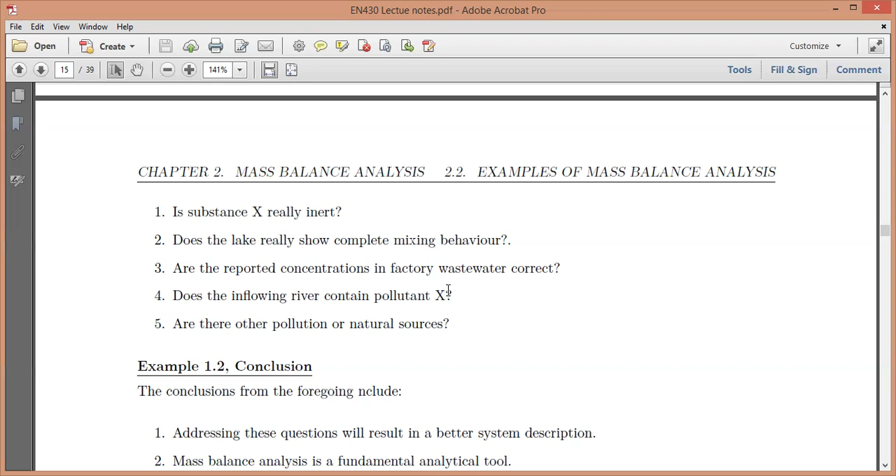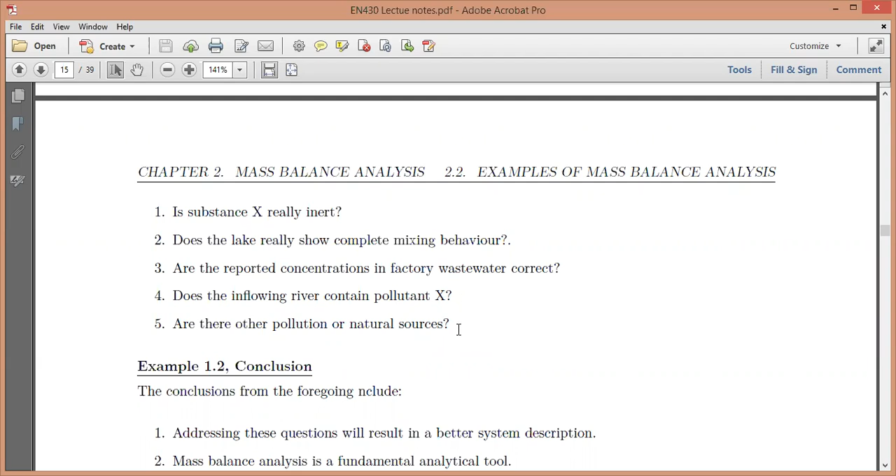Does the inflowing river contain pollutant X? So you may write off the inflowing river as not containing pollutant X, when in actual fact it may be carrying pollutant X from some other effluents that it may have collected upstream. Or are there other pollution or natural sources which could be emitting this pollutant X other than those two factories that you have? So those are some of the questions that you may have to revisit.

Okay. So addressing these questions will result in a better system description, and mass balance analysis is a fundamental analytical tool. So like we mentioned earlier, mass balancing helps us understand where our material is going and whether or not we're using it efficiently. And it also helps us, in this case of the lake, understand the concentrations of these pollutants in the lake or in whatever water body.

So not long ago, there was that truck carrying sodium hydroxide that plunged into the Kampinsa River some months ago. Maybe some of you may be aware, or maybe some of you may even work for the same company. If you were the environmental officer there, what was going to be your main interest in that particular incident? You have sodium hydroxide, a truck plunging and spilling all that sodium hydroxide. So what would be your point of interest as an environmental officer assigned to that, or an inspector under ZEMA? What would you be interested in knowing?

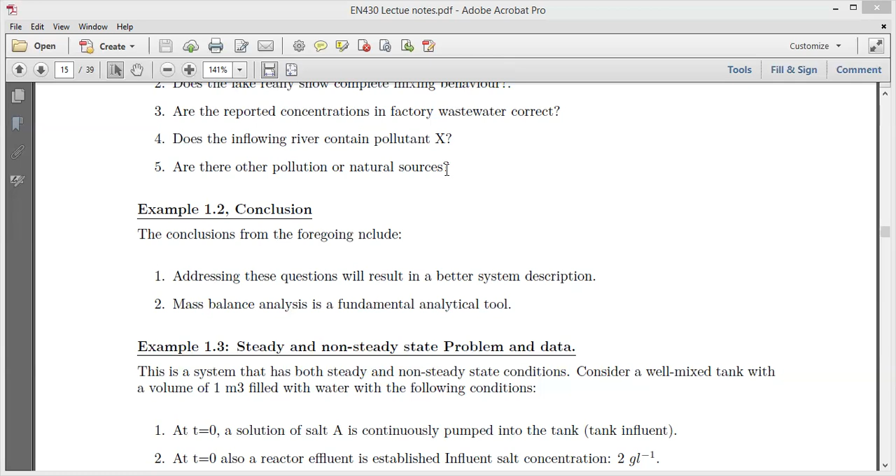Okay, we move on. Let's look at a problem here now that involves steady and non-steady state problem and data. We've understood what we mean by steady state, but we're going to now look at a problem that involves both steady and non-steady state in one question.

So here we're told consider a well-mixed tank with a volume of 1 cubic meter filled with water with the following conditions. Condition 1, at time equal to 0, a solution of salt A is continuously pumped into the tank as tank influent. Remember it's not just plain salt, it's a solution of salt A, continuously pumped into the tank.

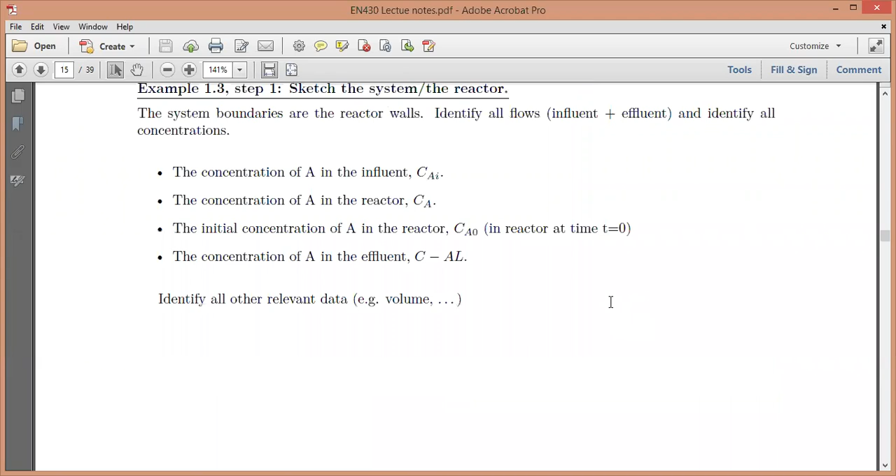I hope you're imagining with me. Do we have the sketch here? We have the sketch down here. Then at T equal to 0, also a reactor effluent.

Sorry about that. I seem to have been logged out. Let me just quickly share the notes again.

I hope we've understood condition number 2. At time equal to 0 also, a reactor effluent is established. Influent salt concentration is 2 grams per liter. Then condition number 3, the influent and effluent flow rates equal 10 liters per second. I don't need to explain again why Fi is equal to Fl. It's pretty clear, isn't it? So when Fi is equal to Fl, what does it mean?

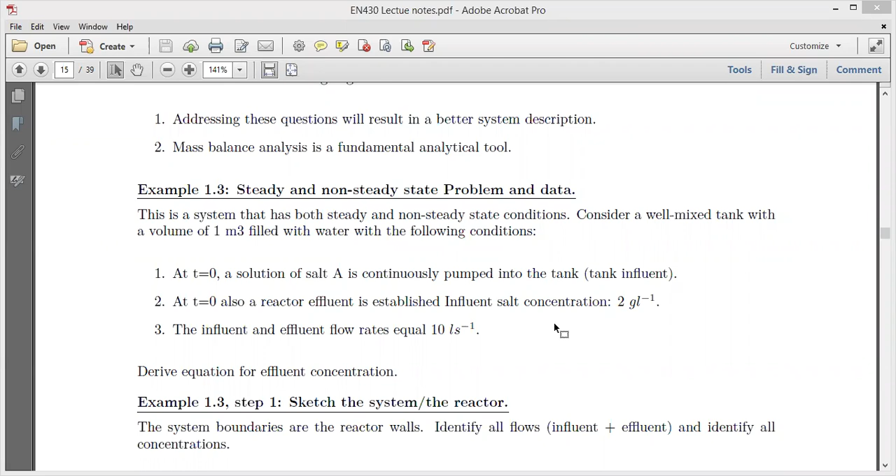Madam. Uh-huh. Doc. Yes. Hello. Yes, I can hear you. Go ahead. Doc, for my sake, I beg that you start over example 1.3, because I missed out a lot on the previous ones. I joined very late and I've been having poor network here. So just for this example, please, if we can start it together.

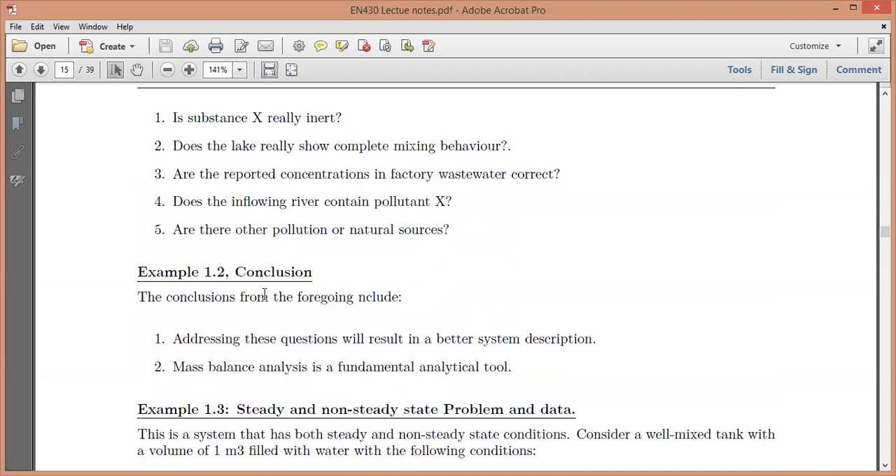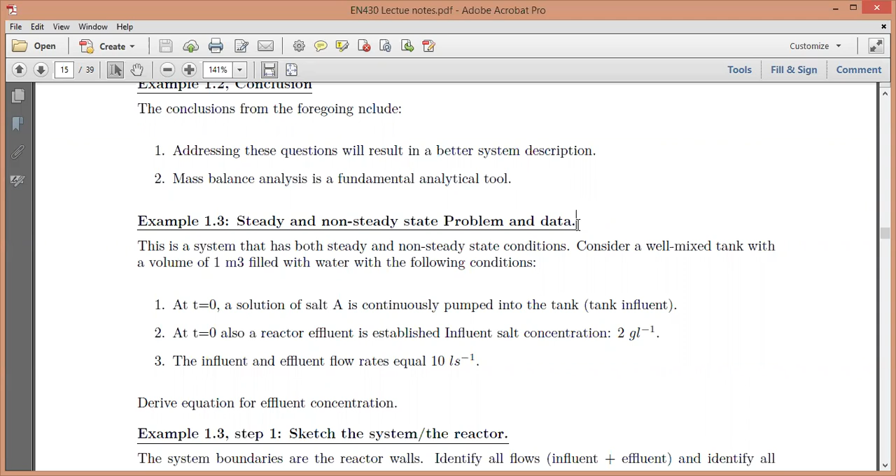Okay, we'll do it. So which one is this one now? Example 1.2 or 1.3? Oh, this one that we just started. Actually, we've not even covered anything. So you're talking about this one, right? Steady and non-steady state problem and data. Yes, I'm talking about this one, though there's an area I missed. What I'm requesting is that at least on one example, I can be fully part of it. Okay.

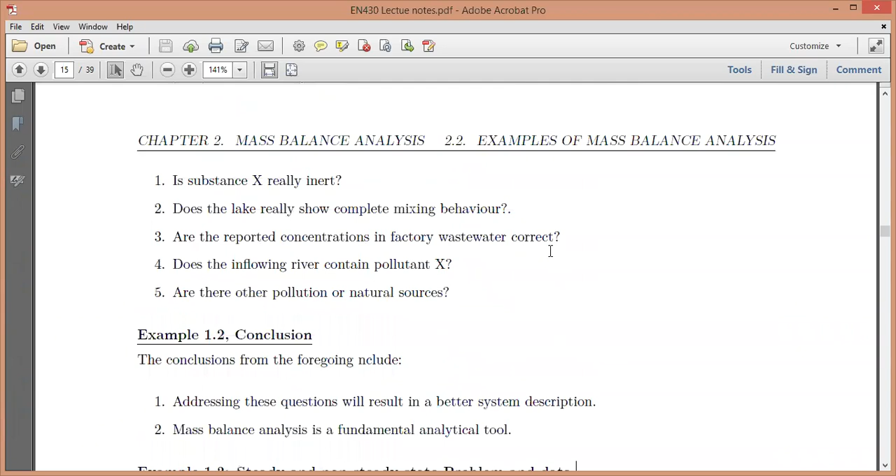Okay. All right. So let's go. I understand what you mean. We'll go through example 1.2 for your sake. At least I know a number of people understood. So we just run through it together. Okay.

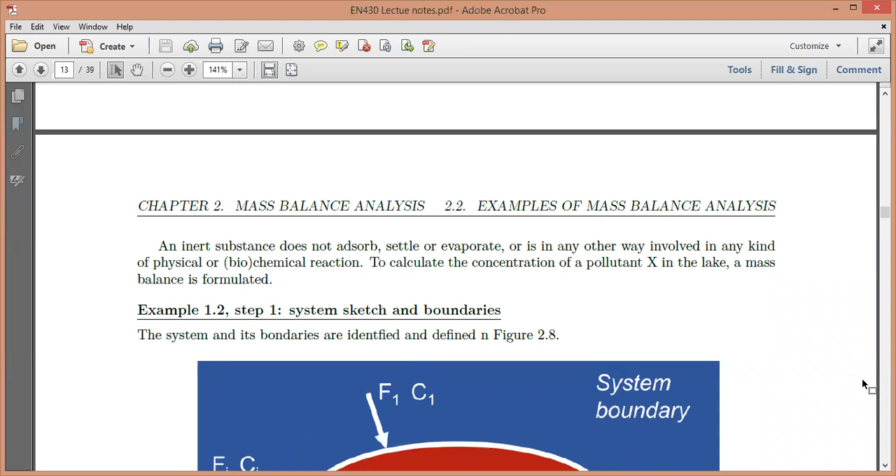All right. So this is example 1.2. We're asked to calculate the pollutant concentration in a lake that receives wastewater from 2 factories. So 2 factories are bringing wastewater into a lake. The lake surface area has been given and the depth has also been given. The lake is also fed by a river with a flow rate of 10,000 cubic meters per day.

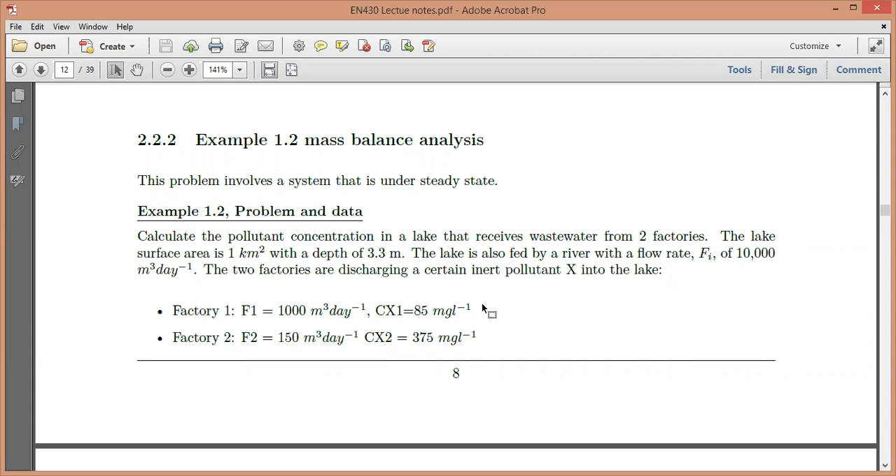So factory 1 is bringing wastewater into the lake and factory 2 is also bringing wastewater into the lake. Aside from these 2 factories, there's also a river flowing through this lake. But this river does not contain pollutant X. It's not been given, so we assume it has 0 concentration of pollutant X. So we assume that CI is equal to 0.

However, for F1 and these concentrations, the values have all been given. The concentration of pollutant X in this stream has been given, and the concentration of pollutant X in this effluent has also been given. Apart from that, what are we also told? We're told that the volume of this lake is constant. So it means that when these start coming in, what happens?

This lake is full and it automatically now at the same instant starts spilling out. So it's spilling through this channel, an outlet here, at the rate which we're calling FL. And the concentration we're calling CL, the concentration of this pollutant X that has come in through these 2 factories. So on the outlet there also we'll have this CL.

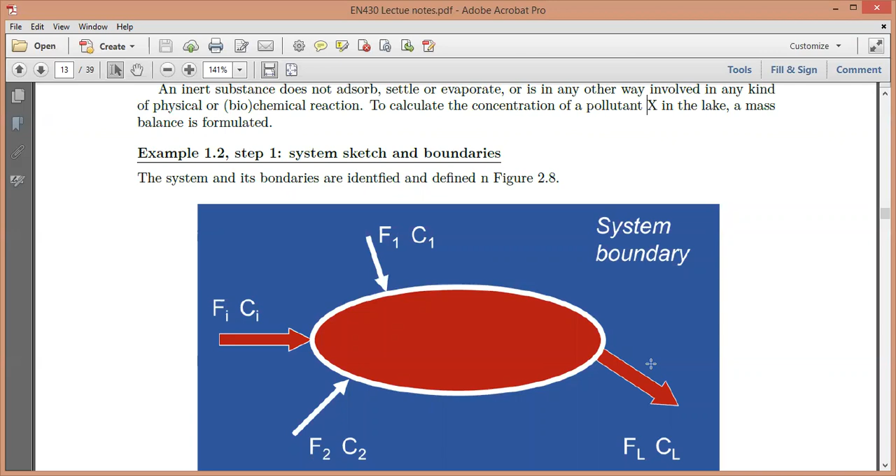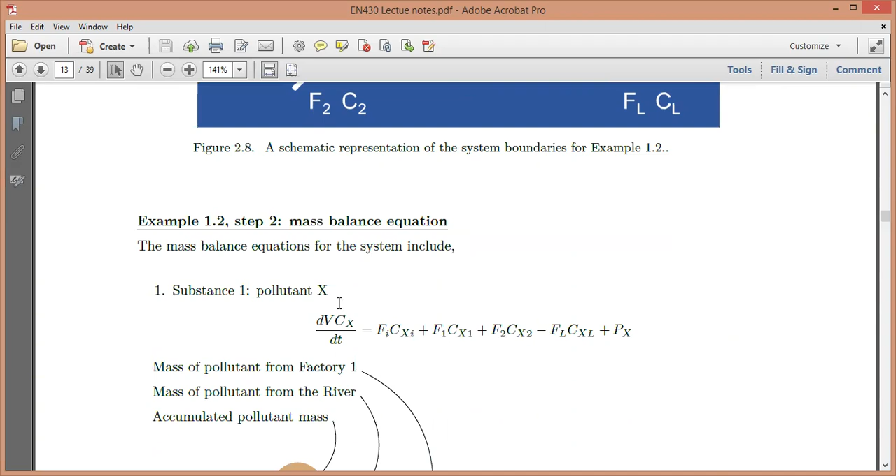So the question is asking us to find the pollutant concentration in the lake, pollutant X concentration within the lake. What we know from last time is that when there's an overflow, the concentration in the lake will be the same as the concentration on the outlet, what's leaving. And we have those assumptions that we made to help us understand that.

So this system involves two species. You have pollutant X, where we're supposed to find the mass balance for pollutant X, and also you have water, because pollutant X is coming in a water solution. So you have this aqueous solution of pollutant X joining here, meaning we have to account for all the water plus the river that is bringing in pure water.

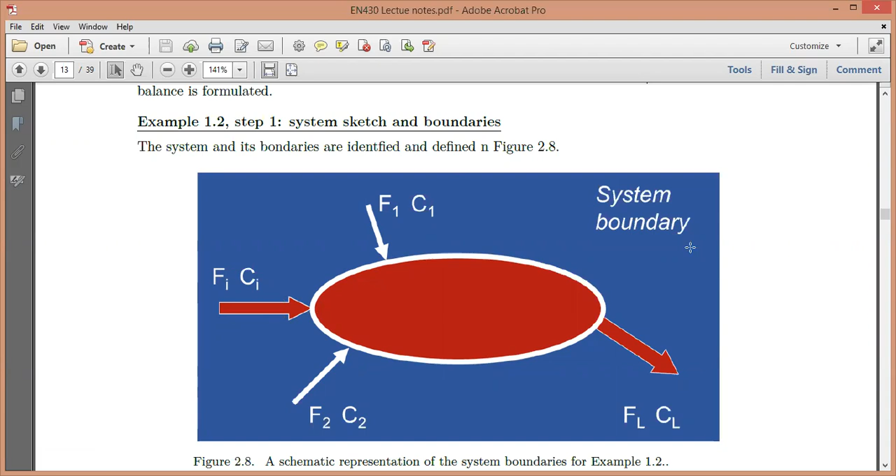We use the same principle for our mass balance: what comes in minus what leaves plus production is equal to accumulation. So for pollutant X, change in volume times concentration over change in time ultimately should give us 0.

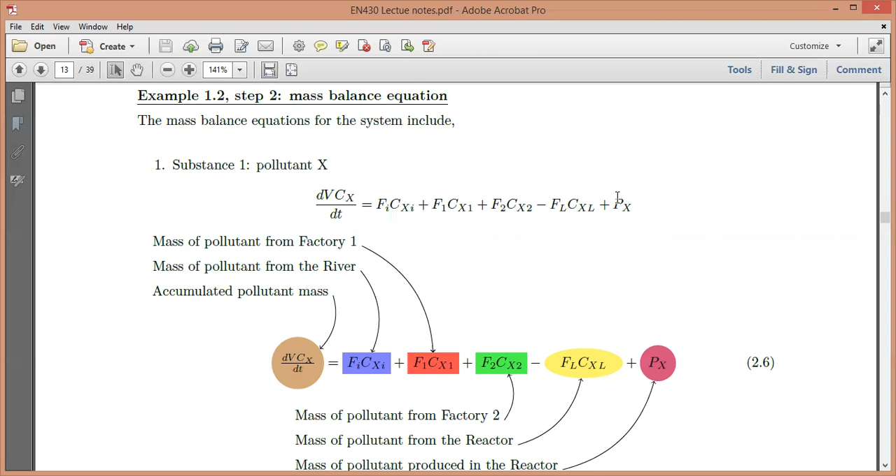What's coming in? This is coming from the river, from factory 1, from factory 2, minus what's leaving, that's the outlet: the outlet's volumetric flow rate multiplied by concentration of pollutant X at the outlet, plus production of pollutant X, if any, in the lake. The lake, remember, is now our reactor here.

Then when it comes to water, what do we know? Change in density times volume over time, which will give us density multiplied by flow rate of the river. So this is for the river, this is for factory 1, this is for factory 2, minus outlet plus production.

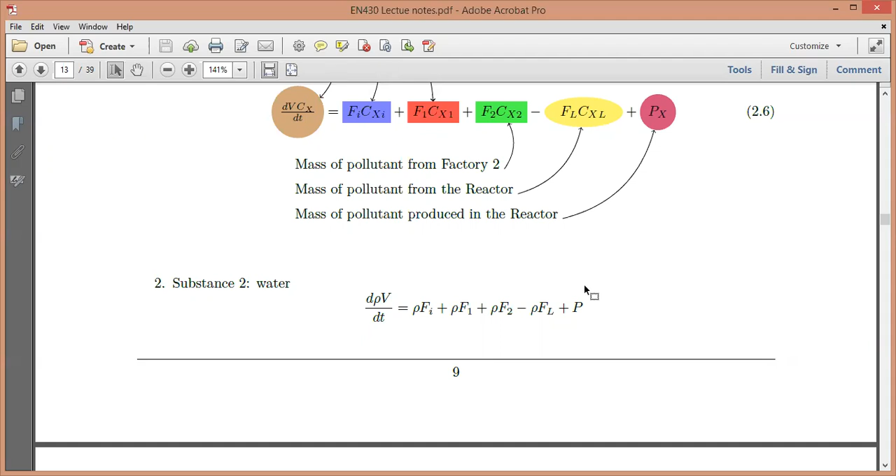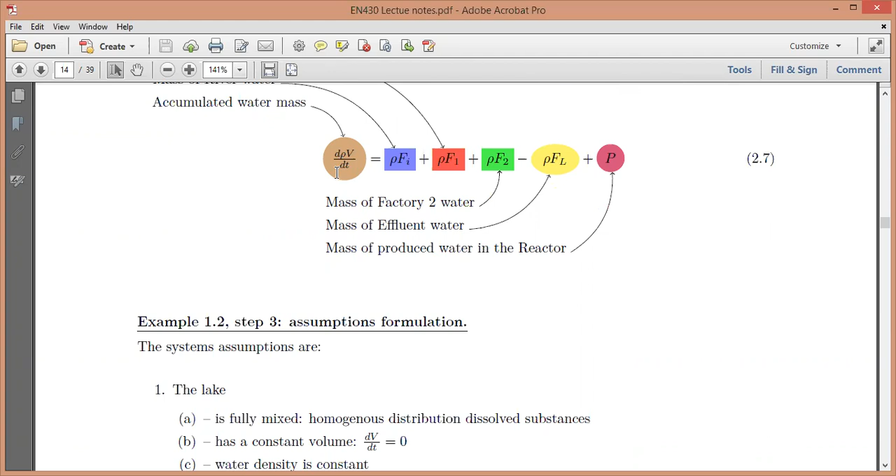Our other assumption is that we have constant density of water. The density of water will remain at 996, or 1000, and it will not change. We adopt the same everywhere. Which brings us here now, change in density multiplied by volume. Remember, the volume of the lake is also constant. So we have that equation there: accumulated water mass is equal to that.

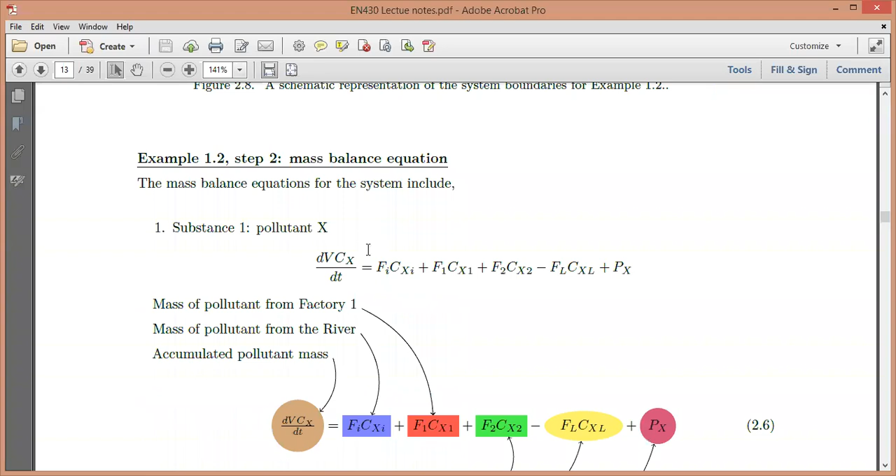So now these are the system equations that we came up with. It's fully mixed, meaning concentrations of pollutant X at this point in the lake, at that point, and this point are all going to be equal. In short, concentrations of pollutant X at any point in this lake should be equal because there's homogeneous mixing in the lake, homogeneous distribution of dissolved substances.

And what else do we know? The lake has a constant volume. It is not expanding, therefore dV over dt, change in volume over change in time, gives us 0. Water density is constant, I've explained this one already. There is no production of water within the lake, that is, P is equal to 0.

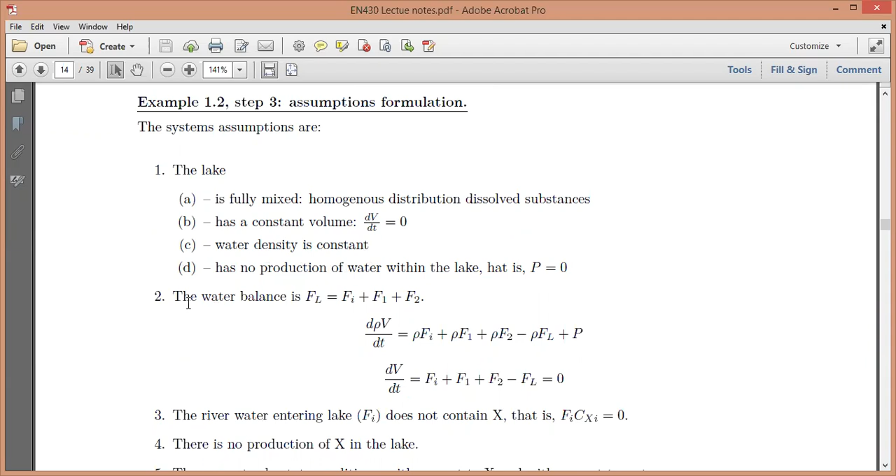Then the water balance: FL, the volumetric flow rate at the outlet, will be equal to what's coming in. Remember, there's overflow now. The lake was already full of water when these factories started discharging into it. So the flow rate of what is leaving is equal to what is coming in. That's why we have FL is equal to FI plus F1 plus F2.

So this one is the mass balance for water. And then in terms of flow rate, it gives us this. When you cancel out the density on both sides, this is what you have left, bearing in mind that dV over dt is equal to 0.

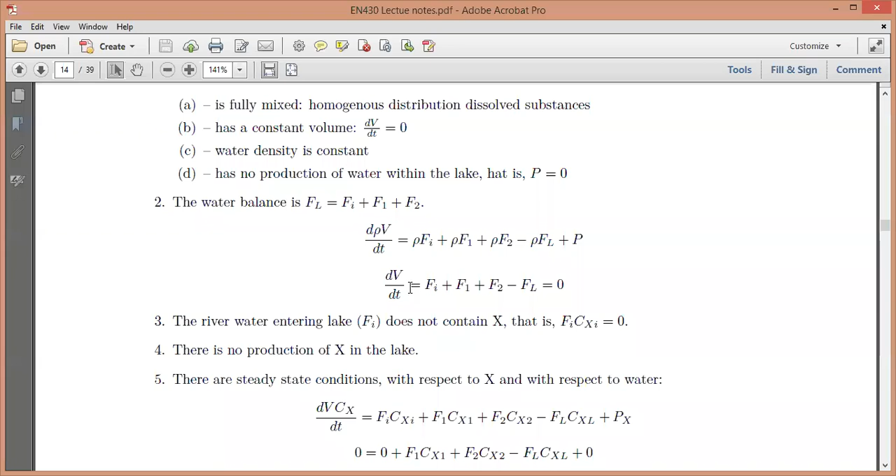So this is what you have left. The river water entering lake Fi does not contain X, remember? So meaning this particular term gives us 0. Why? Because concentration here of pollutant X in the river is equal to 0, because in this river there's no pollutant X. The only place where we've been told there's pollutant X contained is in factory 1 emissions and factory 2 emissions.

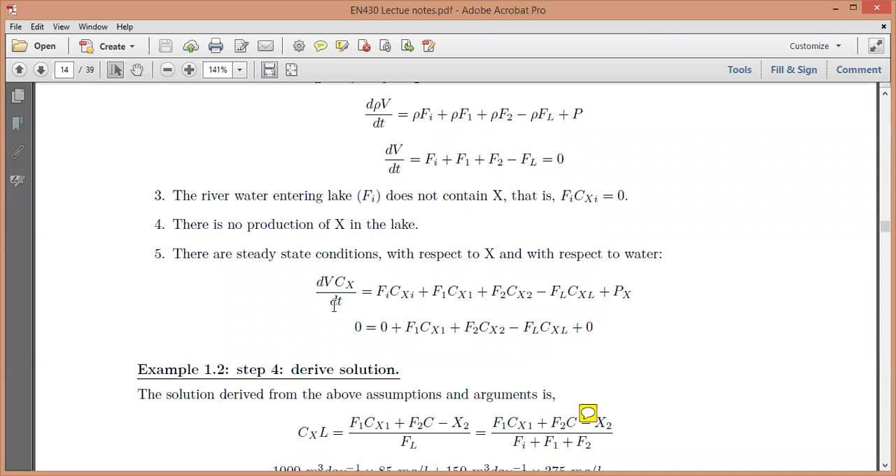There is no production of X in the lake. That's the fourth assumption. The fifth one is there are steady state conditions with respect to X and with respect to water. Okay, so dVCX over dt will give us 0 when we say steady state conditions. So meaning you have 0 here, and here you have 0 because of this. This one remains as it is, and here there's no production of pollutant X in the lake, so you have 0 here.

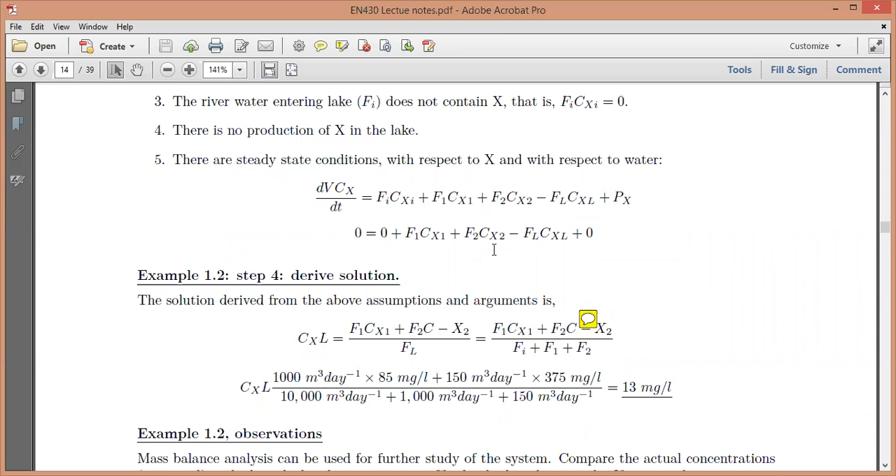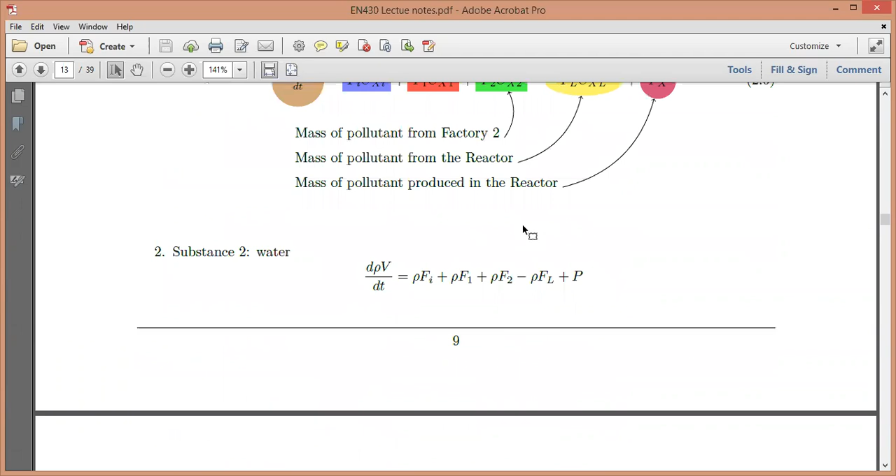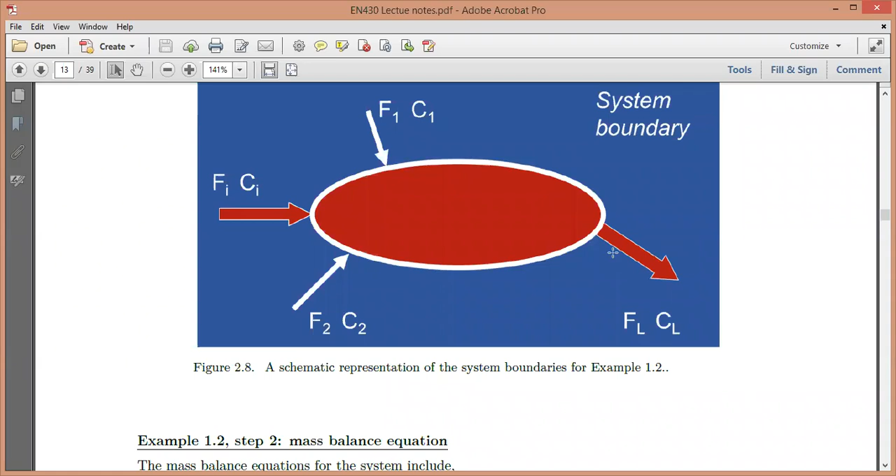Okay, so from here now, this is what we're going to carry forward. We're going to be interested in this guy here. Why? Because this is outlet concentration. Earlier we know that where there's overflow, concentration in the reactor will be equal to concentration on the outlet. The example of when you're carrying a cup of tea and you spill some of it out, the concentration of sugar in the tea that remained in the cup will be equal to the concentration of sugar in the tea that spilled on the table under that assumption.

Okay, so that's how we're going to get our CXL. So when you put CXL on this side of the equal sign, it becomes positive, isn't it? So you have this coming here, and then you have this remaining. So you simply divide this other side by FL, so you have the FL here. So this is basically what happened here. So this is F2CX2. Ignore this. It's not supposed to be here.

Okay, so again, we said FL will be equal to Fi plus F1 plus F2 because there's overflow. And that's how come we have the values there. We're not given this in the question, but we're given all these 3 values, so we make use of them. The concentrations of pollutant X in factory 1 and factory 2 are given, plus the flow rates for effluent from factory 1 and factory 2 are also given. So we simply multiply, divide accordingly, and we get 13 milligrams per liter as our answer.

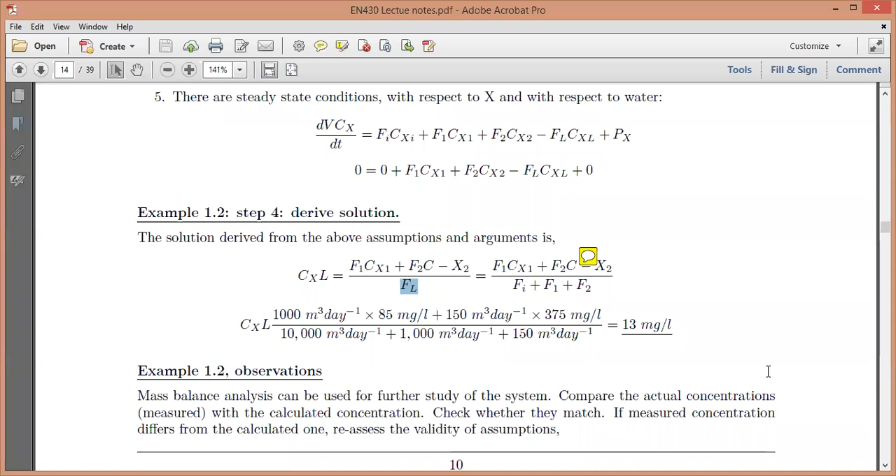Are you able to get me? Someone is saying they're cut off. I hope I'm being heard by someone at least. Yes, it's clear. The network is quite poor today. Yeah, at some point it's a challenge. Okay.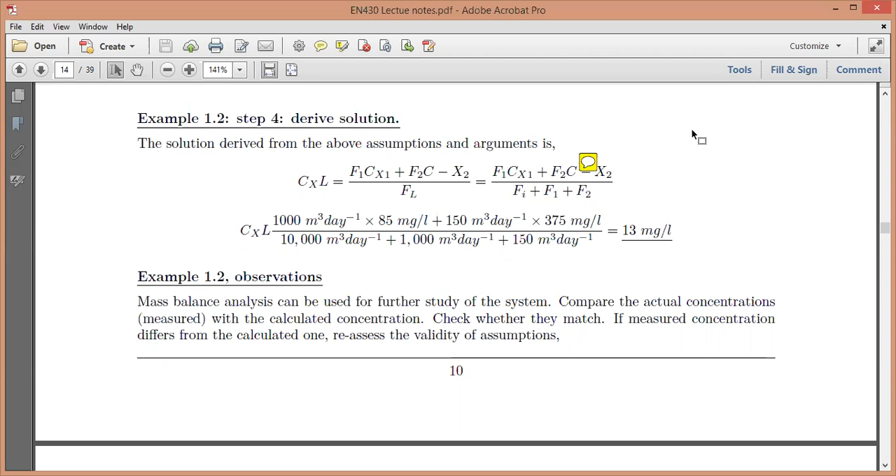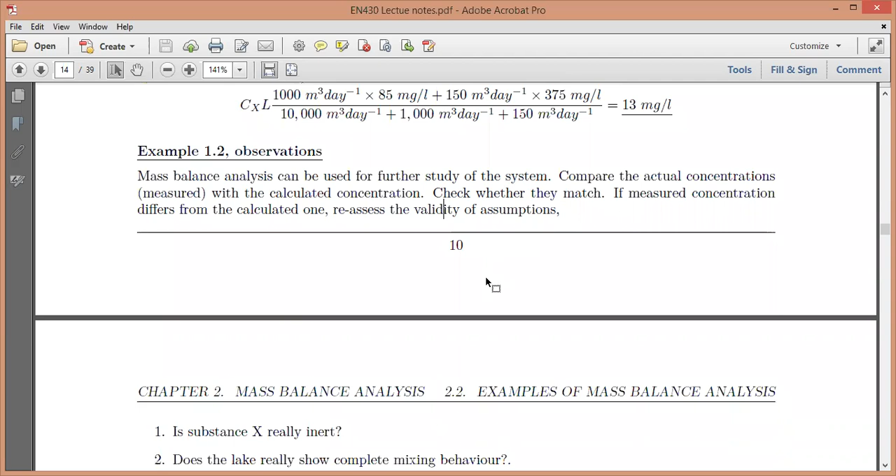Okay, let's come to our steady and unsteady state problem data. So we are here. I hope, was it Gershom who asked us to go back a bit? I hope now you've understood. Yes, it's Gershom, but at some point he was cut. I think he missed some part. I'm following, Doctor. Okay, he's saying he's following.

Okay. I know. What's important is that you're following.

All right, so let's come to our example here, 1.3. Consider a well-mixed tank with a volume of 1 cubic meter filled with water with the following conditions. So at T equal to 0, a solution of salt A is continuously pumped into the tank. So you have a solution of salt A being pumped into this tank as tank influent. So it's coming into the tank.

At T equal to 0, also a reactor effluent. So effluent meaning what? What's reactor effluent in this case? Is it FI or FL? It's FL. Yes. So FL is established at the same time. So then we're given the influent salt concentration, which is 2 grams per liter.

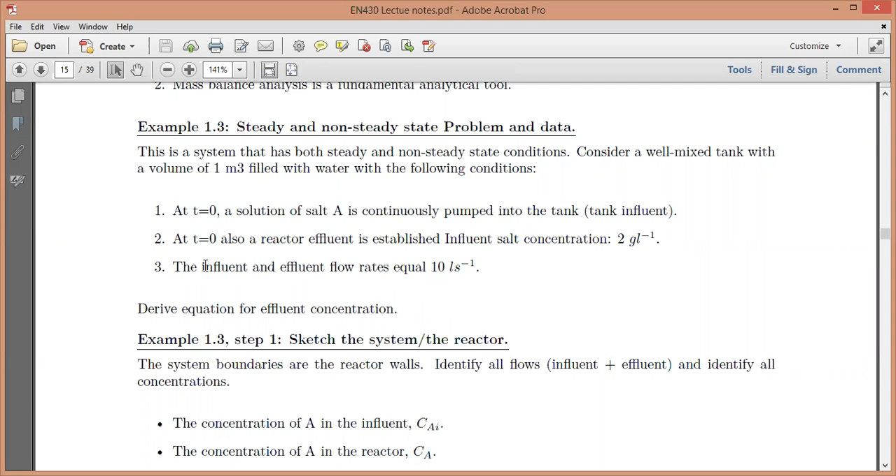Third condition is that the influent and effluent flow rates are equal to what? 10 liters per second. So I was saying in a case where you have Fi equal to FL, it means that there's overflow, isn't it? That FL is actually overflow. We've been talking about this. So that's why the flow rates are also equal, 10 liters per second for both influent and effluent.

Derive an equation for effluent concentration. So what's effluent concentration? What's leaving, isn't it? So that's going to be our CL. If we're going to call our salt A, it becomes our CAL. That is what we're being asked to find, CAL. This question is very similar to the one that we just looked at. So we define our system boundaries as what? The reactor walls, or the walls of this tank, as you can see here.

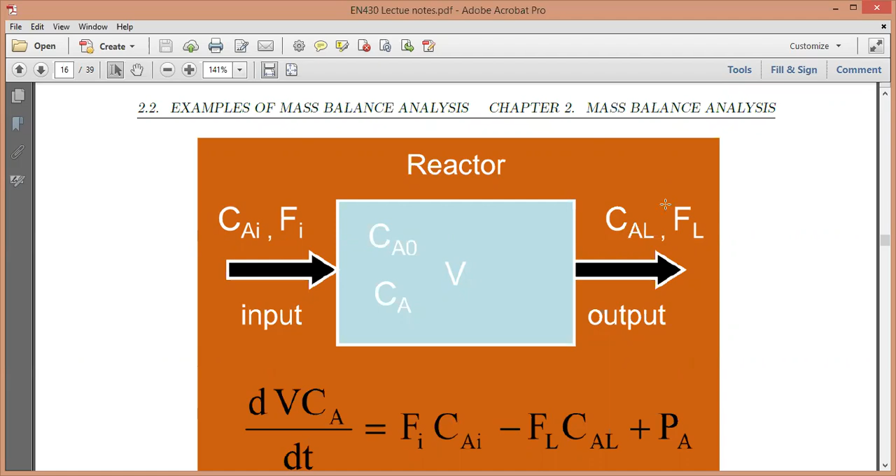So you have salt solution coming in at T equal to 0. You start pumping in salt solution at a known concentration of the salt. We've been given salt influent as 2 grams per liter. What else do we know? That's the input. We've been given the volumetric flow rate for the input, and we've been told that the input flow rate is equal to the output flow rate, which is equal to 10 liters per second. Those are the 3 conditions.

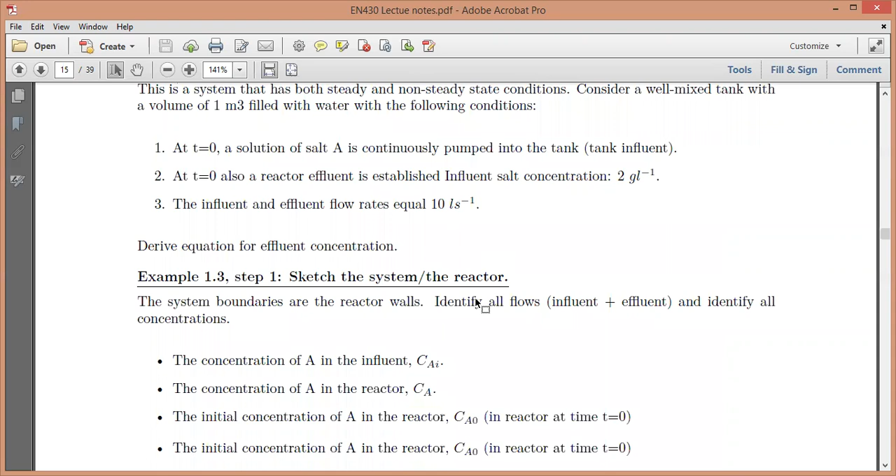So the system boundaries are the reactor walls. We're supposed to first identify all flows, influent and effluent, and all concentrations. The concentration of salt A in the influent becomes our CAI. The concentration of salt A in the reactor, the salt inside our tank. And the initial concentration of salt A in the reactor at time equal to 0. At T equal to 0 there's no salt, so our CA0 within the tank will be equal to 0, only at this time.

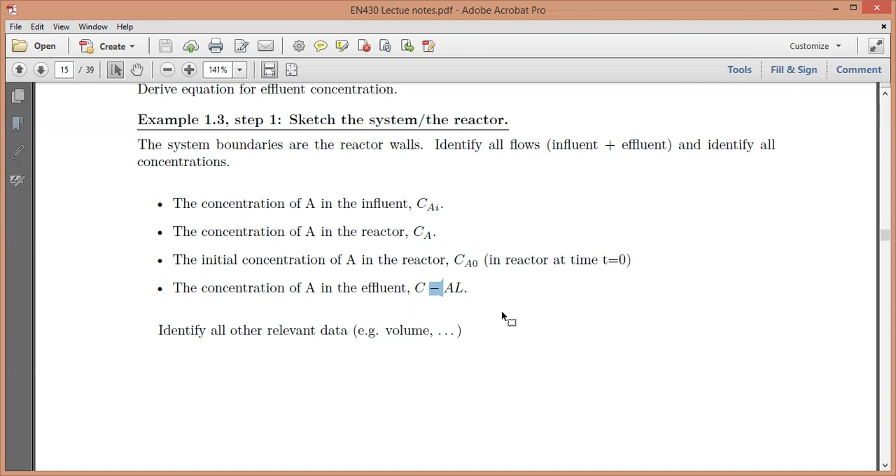Then lastly, the concentration of salt A in the effluent, which is CAL. This also is a typo. So concentration of A in the effluent is CAL. So now the next step here is to identify all relevant data.

Any questions so far on identification of our influent and effluent and concentrations? Are we all clear? If you're not clear, just simply mention and we look at it again. Silence means we're all clear. Okay, we move forward.

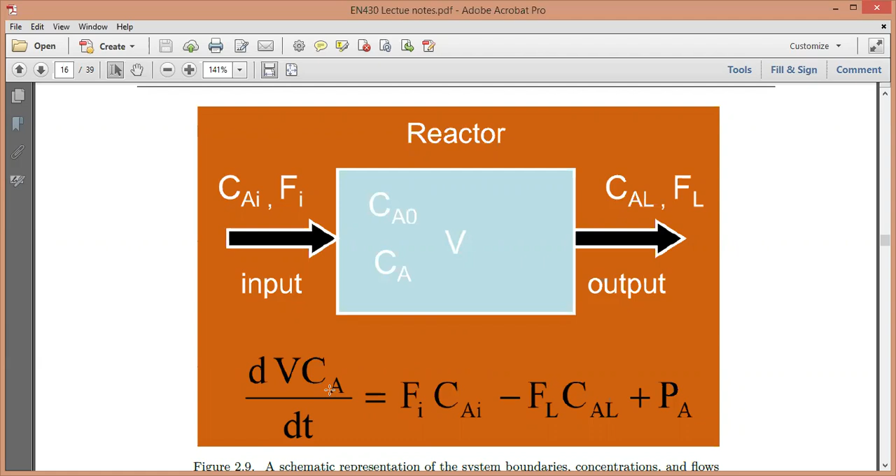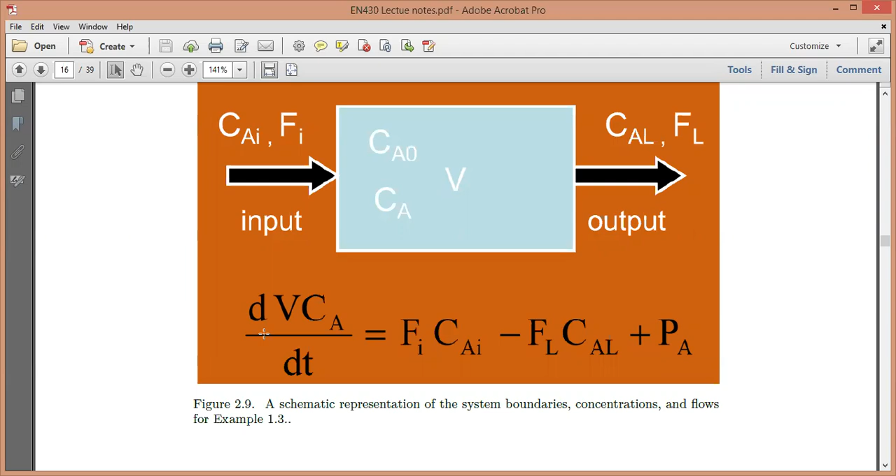Now we're looking at all the relevant data. The volume of the tank remains constant. Then you have our CA0 at t equal to 0, which will be 0. Then you have our CA at different times, at a certain dt. So you have dVCA over dt, which gives us inputs minus output plus production of salt A in our reactor. This becomes our accumulation, our mass balance for salt A.

So now formulating the mass balance equations, I think this is becoming simpler as you see this. dVCA over dt is equal to what's coming in minus what's leaving plus production. Let's try and understand what's happening here. How do you explain this? Equation 2.9. Look at it carefully and tell me what you understand from it.

Can I try? Yes, please. We're looking at the volume of the tank, which is fixed. The concentration of salt that is given to the tank happening at unit time.

Continue. Have we lost you? No. Okay, you're still thinking. Please feel free, take your time. Okay, let me think further. Okay, anyone else to help him while he's thinking?

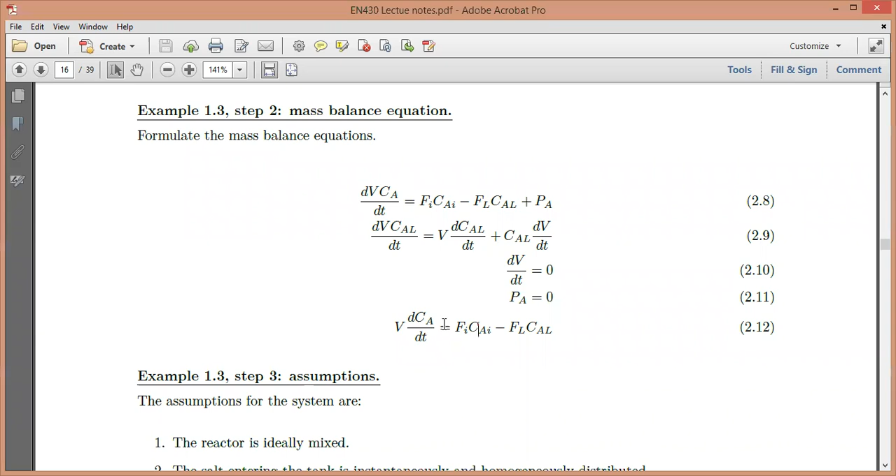Now we look at the assumptions for the system. First, the reactor is ideally mixed. In reality, that's hard to achieve unless you have a mixer there. Second, the salt entering the tank is instantaneously and homogeneously distributed, also difficult in reality. Third, the salt concentration is uniform in the reactor. Therefore, the effluent salt concentration, CAL of T, dependent on time, equals the salt concentration in the reactor.

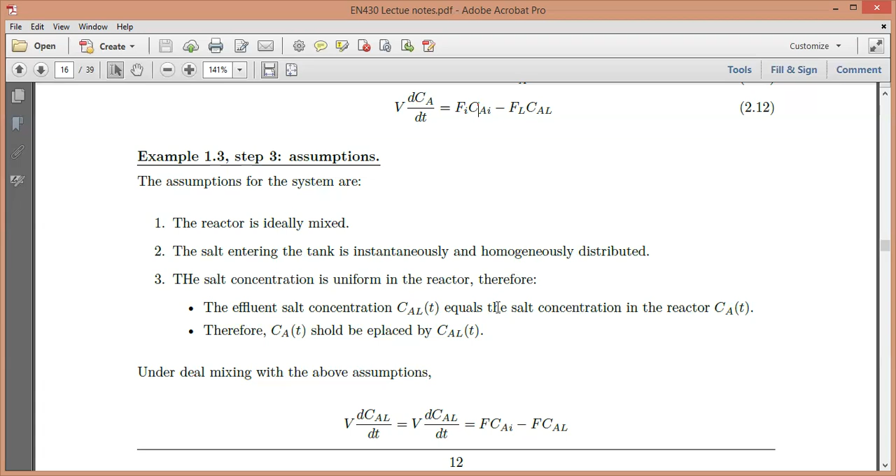So the effluent salt concentration, CAL as a function of time, equals the salt concentration in the reactor. Think of spilling Fruticana from your cup, the concentration remains the same. That principle applies here. Therefore, CA as a function of time should be replaced by CAL as a function of time. We agree? Yes. Okay, so in the reactor it should be replaced by this one because it's the same.